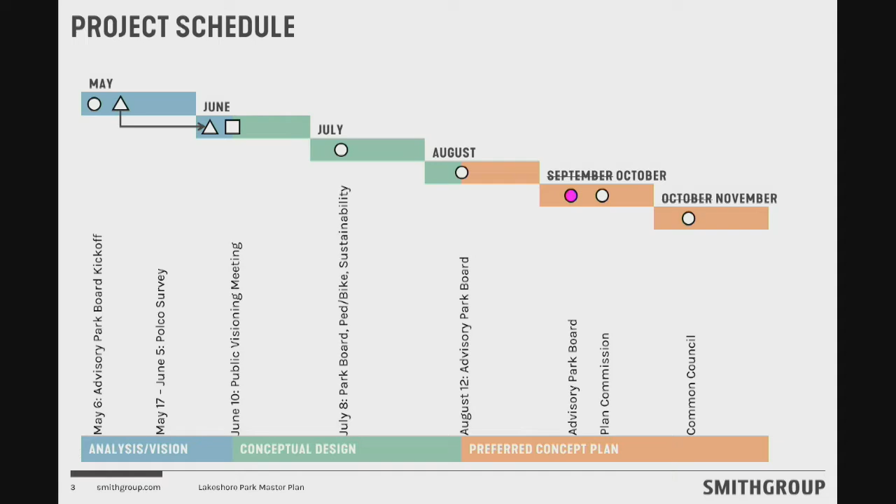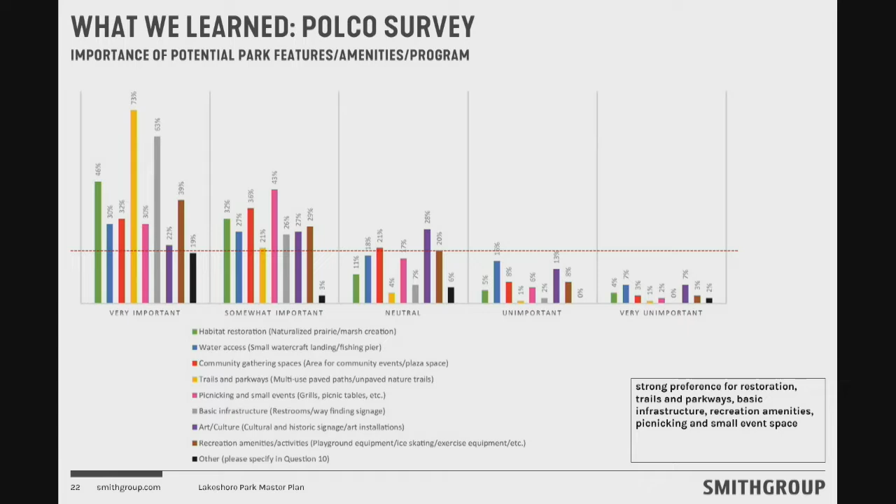In the bottom right, that's our coarse-grained summary of the takeaways: there's a strong preference for restoration, trails and parkways, basic infrastructure, recreation amenities, picnicking, and small event space. So really, a nature park with space for people is one way to describe it. Depending on what we were looking at, preferred activities, time of year, etc., the results kept returning that same basic message. Even the comment cards where people weren't answering our specific questions, we were still hearing the same thing - public art, trails, and nature ranked highest.

Last time we also talked about the big drivers in terms of how we're understanding the site and what we're trying to do with the design. The 3 options we talked about last time in August really focused a lot on water and leveraged water as an organizing backbone for the site, if you will.

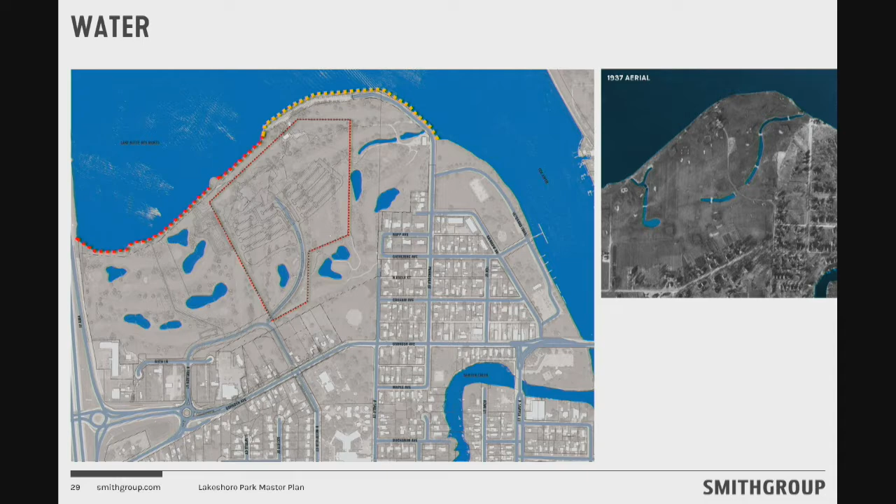The existing ponds are in that diagram on the left, and then the aerial here is the 1937 aerial. You can see those ponds were really more of a little broken stream - this was the remnants of when the river meandered and moved around more than it does today. We were interested in figuring out how we could work with that history.

We talked a lot about edges. I think we have over 4,000 lineal feet of shoreline. Importantly, we also have these two connections to Rainbow Memorial and Mary Jewell Parks. So really what we do at Lakeshore, along this east edge, can work to connect the parks together. With Rainbow in particular, that's all about waterfront connectivity, a big important move at a city scale.

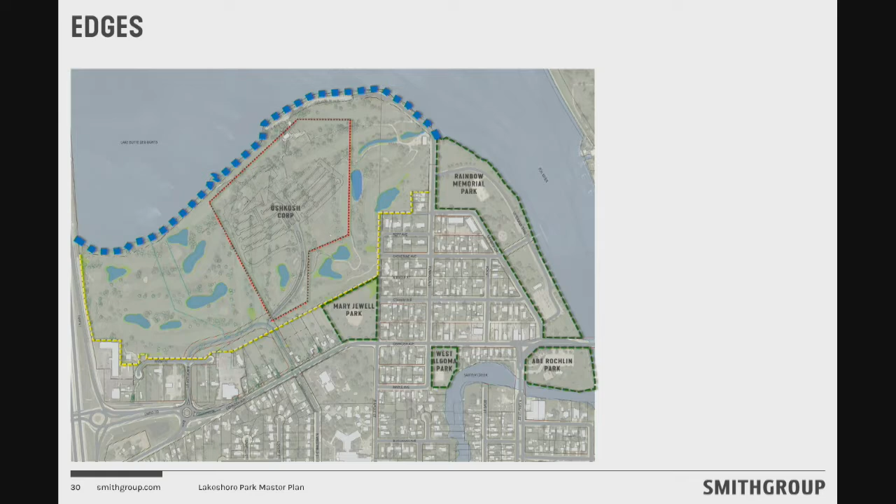The yellow dash line is where the park backs up to mixed use development and existing residential neighborhoods. One of the big takeaways was that the west half of the park has edges that are a bit of a back door - there's the hotel, the freeway, and the businesses at the west end of Oshkosh. So that west end started to have this introverted character, kind of an island park.

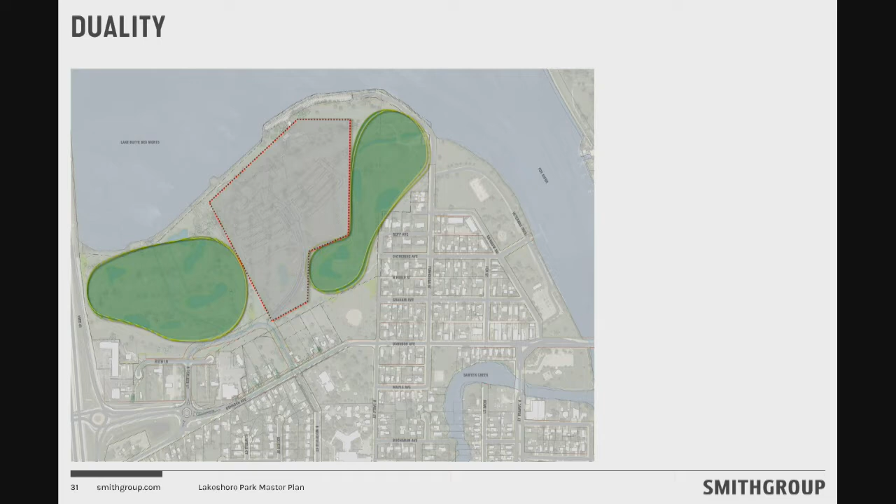The east end is the point where you go out to the end of Punhoqua, you kind of immediately engage the lake, and there's the connection to Rainbow Memorial. So two very different halves grew out of this way of looking at the park.

And then this is where I just wanted to run through really quickly those precedents that we looked at last time. We had this idea of the threads, places, and moments - just our way of organizing our language.

So we've been looking at water and restored habitats, and I think the big takeaway is, even if the pond network sort of remains in situ, we're still looking at restoring the margins of all these water bodies as part of this phased implementation process. Right now the ponds are bodies of water with cattails at the margins that quickly transition to lawn, because it's a golf course, or it was a golf course. I want everybody to keep images like this in mind when they think about the future condition of the pond, because the idea is to aspire to that nature park.

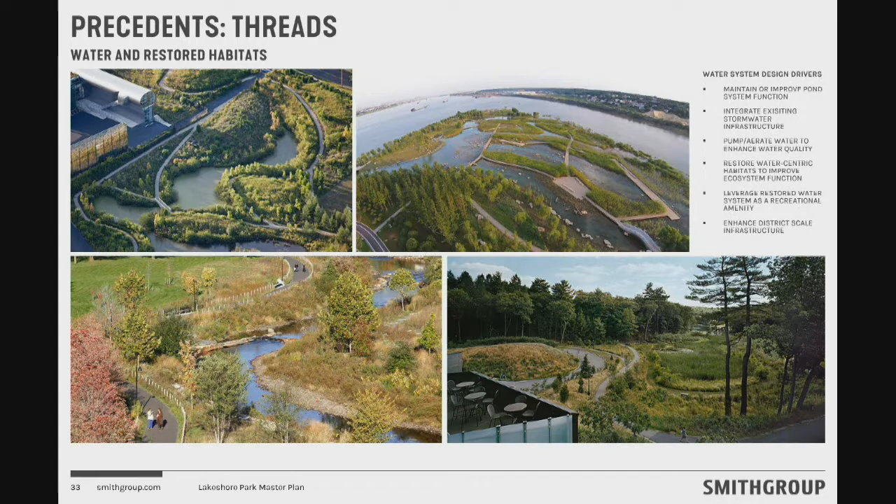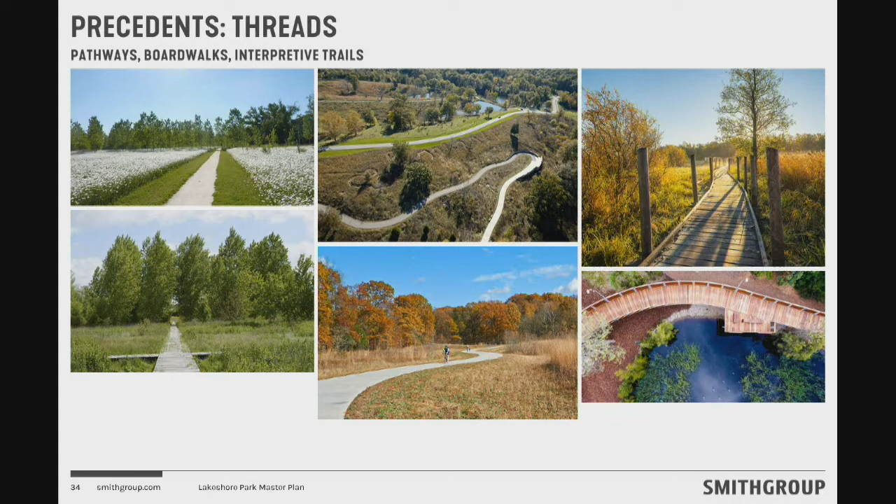Of course, a park of this scale needs trails, pathways, and boardwalks critical in terms of connection, which is one of the basic program elements of the park. Open buildings too, everything from naturally ventilated restrooms to open air picnic structures, are things we've been looking at locating throughout the park.

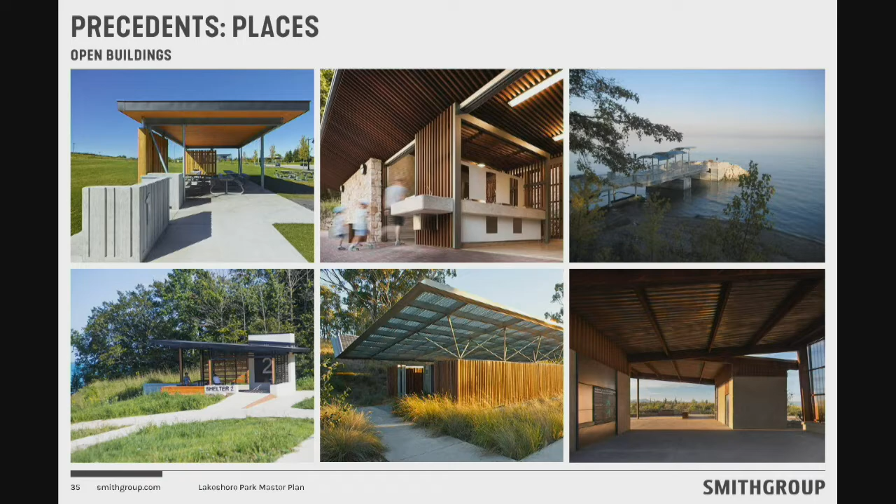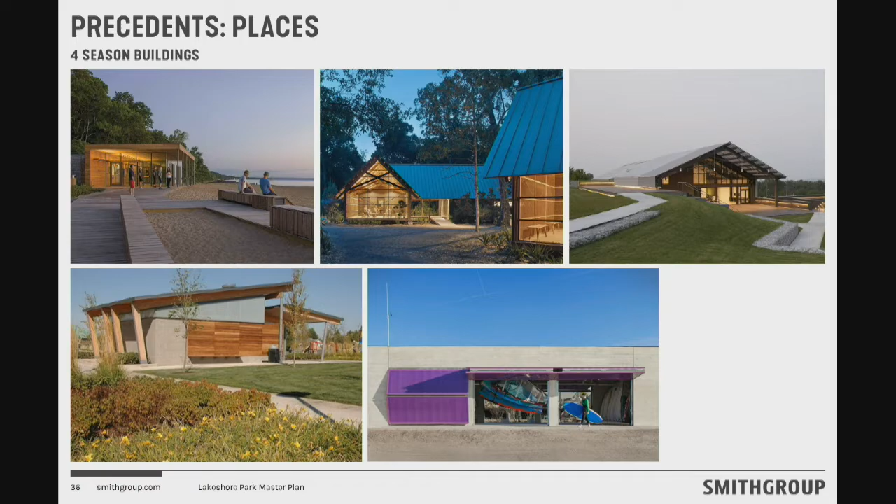We've also been talking a lot about a four-season building, and last time, all three of the options we showed you put that building at the end of Punhoqua. There's infrastructure there, there's a street there, there's a lot of good rationale behind why it found its home there. We'll have a little more info for you on that.

And then this idea of earthworks, in particular at the west half of the site. The freeway noise is pretty dominant unless you get down to a low spot or you're protected by topography, so the idea is building up the earth around that core area to make that an inviting space.

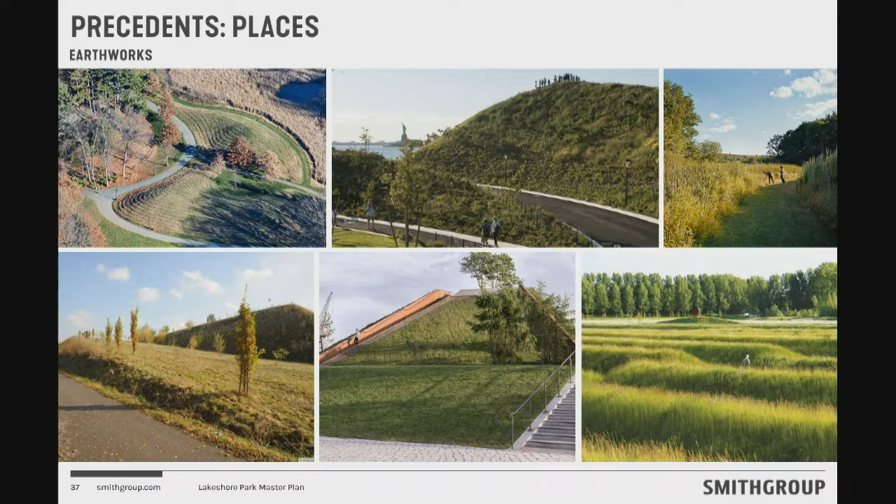And then just smaller places throughout, places to launch a boat, park your bike, places with signage, overlooks, that sort of thing. These are the smaller things that at the grain of a master plan on a park this size, you almost can't even locate in a plan, they just sort of disappear. But these are things we always have in mind as we're thinking about trail networks and designing space.

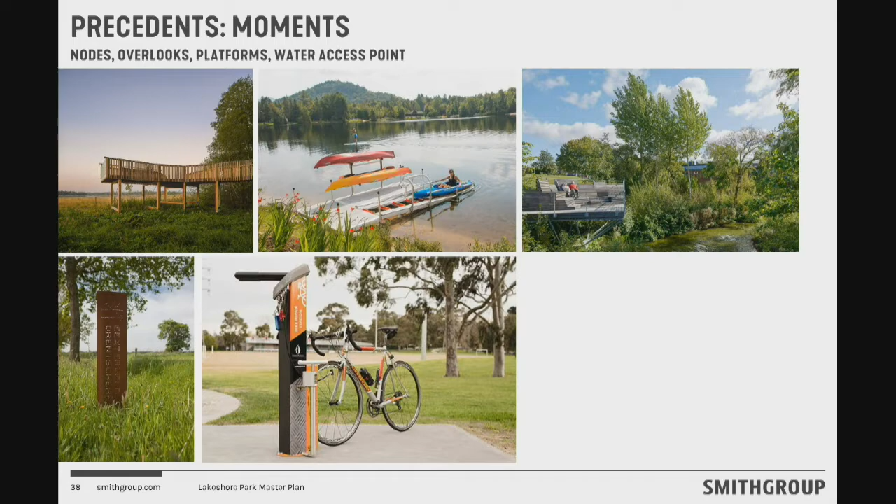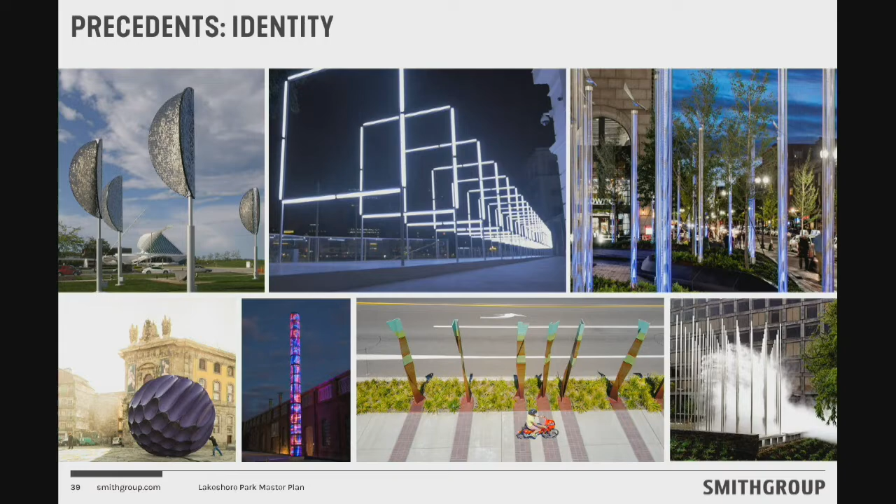And then this idea of art. Last time we talked about this as a way to put an exclamation point on top of one of those earthworks at the West Park to create a sense of identity. It could be everything from literally a sign that says Oshkosh to something more abstract. We also talked about something akin to a light installation that would work well at night, giving people a reason to hike around the park in winter.

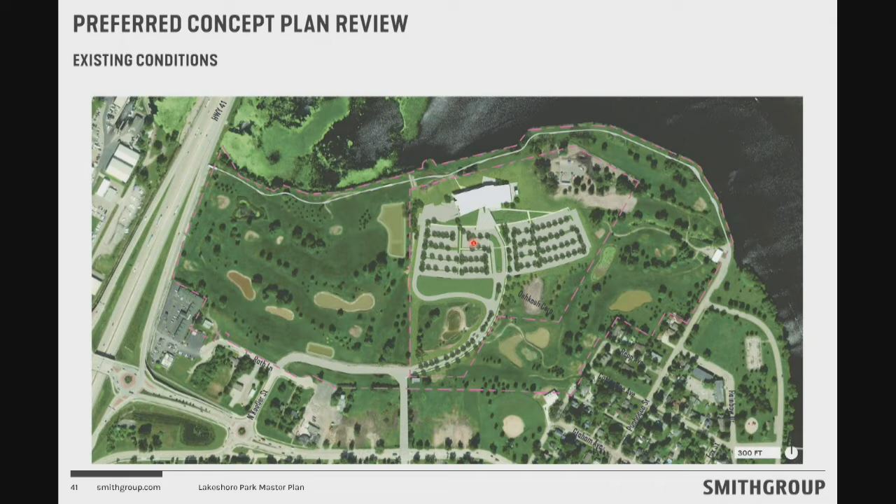So this is the existing site with the Oshkosh Corp site rendered in, and also you'll note the trail rendered along the waterfront. So that's that white band that snakes through.

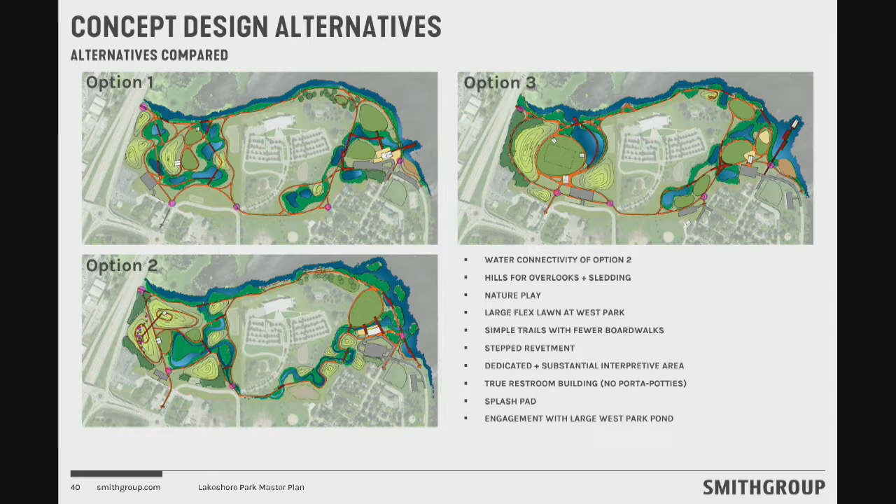This is where we're at with the preferred concept plan. It's pretty similar, if I can jump back really quickly. It has a lot in common with both option 3 and option 1. We kind of went back and forth about the best way to approach the water system, and that really became a big driver for where things landed on the site.

Where we're at right now with the water system is that we're maintaining the ponds more or less in place and maintaining their function. So think about it in terms of the pipes that engineering just put in last year are still in the ground, connecting the ponds in the same way. The elevation and the bounce on the ponds is the same as it is today in terms of how they work to manage stormwater and move it through the site, which happens in a counterclockwise fashion, right?

More or less. What we're proposing is that these things kind of work the same way, but we come in and regrade the margins of all these ponds, and in some places we add small extensions. That's why you see some of these shapes in the preferred concept not being a one-to-one with what's out there today. But we were working with the assumption, from a costing exercise standpoint, that we would basically touch 50% of the edges of these ponds to rework them and make them feel more connected.

And then the dark green that you see weaving between them is that idea we talked about last time, which is the wetland habitat vegetation type that we would use to link them together visually, even though we're not necessarily going to have an overland flow connection from one pond to the other. So they become part of one network, but we took an approach from an investment standpoint, a maintenance standpoint, etc., to work a little more closely with the footprint of what was out there.

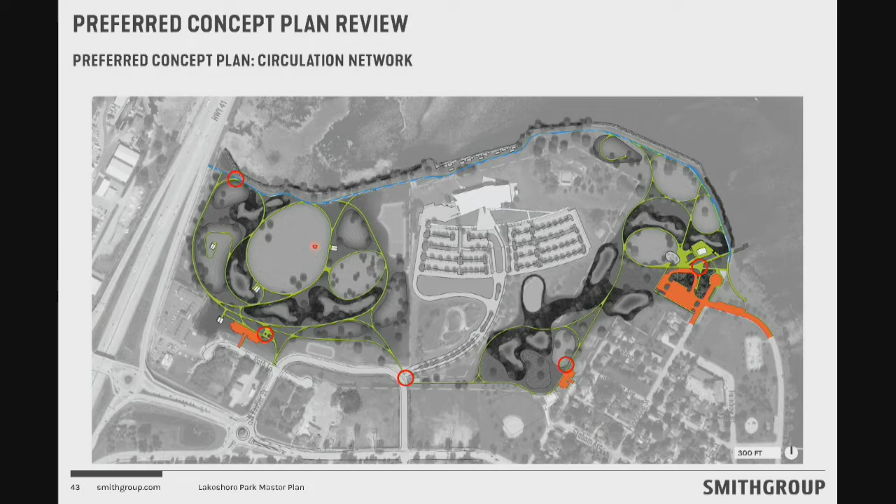I mentioned earlier that we've been thinking about this West Park as being a little bit more introverted, just given its context. So between this ring of water and the ring of earthworks, you get a feel for how well defined that great lawn in the middle of the West Park becomes. But still trying to maintain some long sight lines to the water from that lawn.

And thinking about views from these small buildings - these are the open air picnic shelters - one kind of across to the hilltop with the overlook and the artwork, one kind of the long view through the lawn looking towards the water.

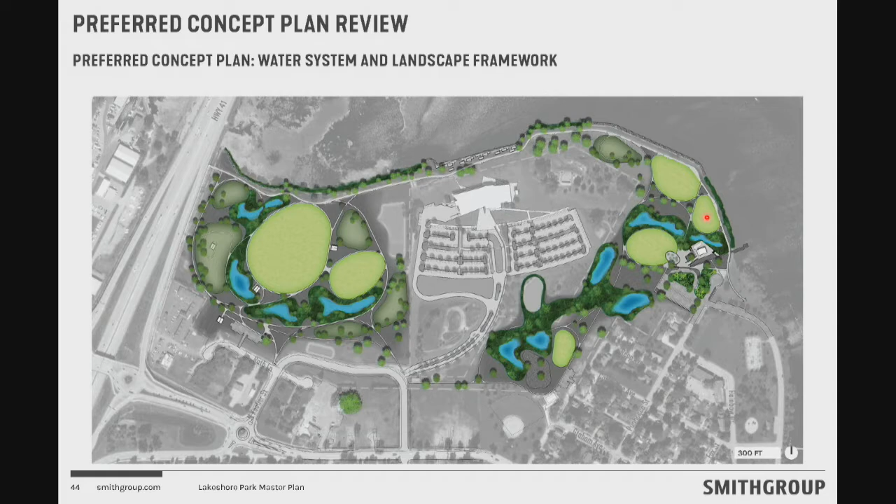And then at the east half of the park, you get that same sort of definition with water surrounding this phase 1 knuckle and a couple big open lawns that front the water's edge.

And we can go through this in a little more detail too. So this was in your packet - this is the kind of 3-zone breakdown. We'll look at the West Park first.

So again, the idea of these earthworks that help to contain the site, block some of the noise from the freeway, block some of the less desirable views, like the Oshkosh Corp parking lot. You'll still see the building peeking through in the background, but to kind of give you some foreground other than that slope up to the parking.

Two big lawns - one a little bit more densely planted with trees. The thinking here is this one starts to dissolve into this forested edge. The water system, and then down here we've located the restroom building. It's kind of towards the periphery of the site, but the reality is that this is the point where we have infrastructure and can gravity drain a restroom.

So if we were looking to put this somewhere else, we'd have to get a little bit creative in terms of something in between a porta potty and a restroom.

So about how far is that restroom and the parking lot from the actual open-air picnic, from the lawn? Like, you'd carry all your stuff to that? Good question. So the parking lot is 60 feet wide, so I'd put it at 200 feet to this park shelter. But that's a very good question in terms of wheeling stuff in.

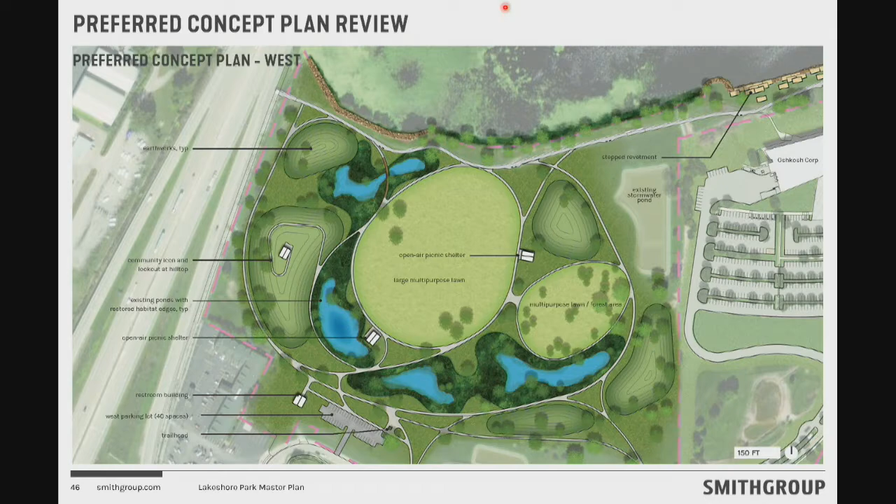Ray, do we have the staff to maintain this once we blow the 2 million?

We really don't have the staff to maintain what we currently have, Bill, and you'll see that in our budget request that's coming to the council next week. We're in the same boat as anybody right now, struggling to find staff, keep staff. That's why we're proposing our budget to increase our staffing potentially if available, and I think we're going to have to — we're falling behind on just routine maintenance in our other parks, so continually adding this and Riverwalk and other things to us is becoming a burden.

So once we are fully developed here, it's going to take some maintenance. We're going to have restrooms to clean, and all the other things that come along with added amenities and features. So we don't have the staff today to do what we're looking at. Completely developed, I would say no. Okay, all right.

So, the big overview for the east half of the park — we'll look a little bit more closely at phasing, but there's the four-season building with associated terraces, a public plaza with a splash play feature, a large flexible lawn, and a couple more big lawns closer to the water. These are pretty substantial size-wise.

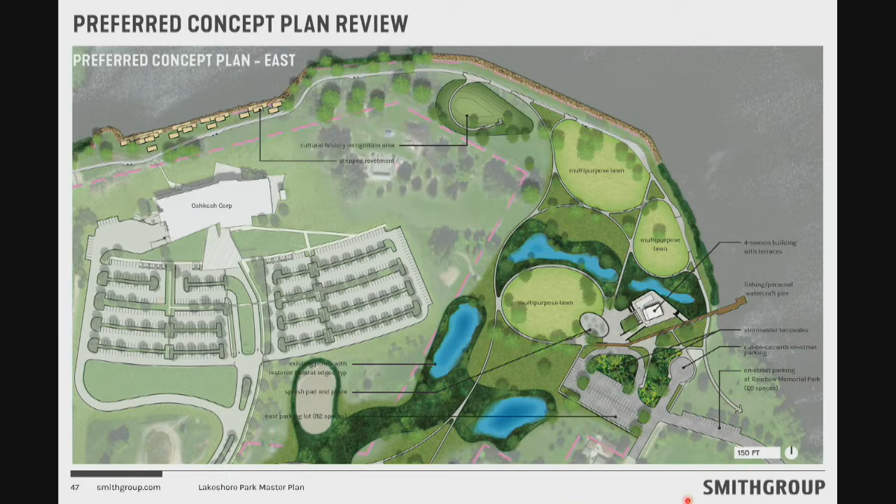And then, wanted to zoom in on this a little bit so you get a slightly better feel. The idea here is in terms of arrival: if you're coming in by car, you'll be coming through a drop-off loop or coming right into the parking lot.

What we propose to do is pull that building and its terraces up a few feet so that it has good views over the ponds, over the park, to the water. It also gives it a bit of significance relative to the rest of the park. And the other thing that does is this building is about 2,500 square feet.

That is a pretty good size for accommodating somewhere between 120 to 175 people in kind of a flexible venue space, with associated restrooms and things like that. So the thinking would be that this building has dedicated restrooms for the interior space and would also have exterior entrances for restrooms that would serve the park.

So by putting this up on the terrace, not only do you gain some views to the surroundings and make the building very visible, but you also allow the splash pad and the plaza to keep working even if there's an event here, because it's easy to rope off those two zones and have them doing different things at the same time.

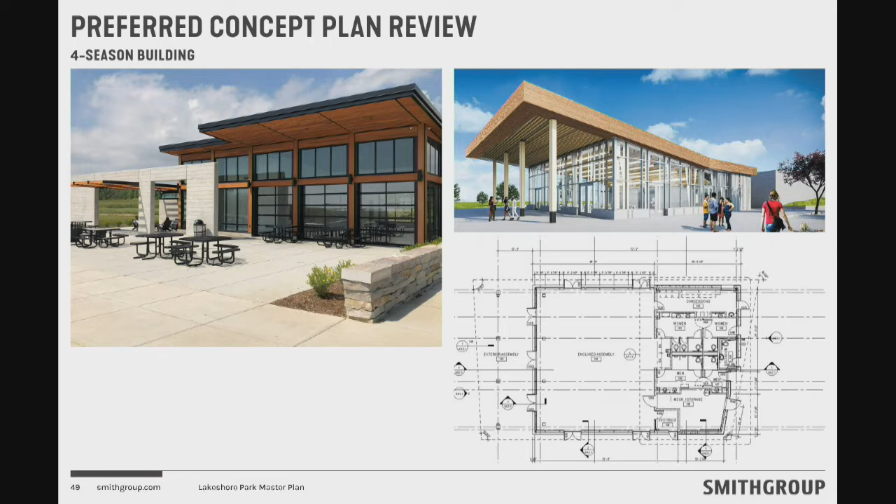You want to get married? No. I meant to me. Oh, no.

Can you go back, Nathan? We've had some discussion about bioswales versus adding more ponds, so if you want to talk a little bit about that—on this drawing? Yes. So the thinking is that we're introducing quite a bit of new impervious area at this end of the site between the plazas, the terrace, the building, the parking, etc. So these two big zones of textured green between the cul-de-sac and the drop-off, and within the drop-off itself, we're imagining those would be stormwater GI—basically bioswales, detention areas—to treat that stormwater before it gets passed down to the pond network.

So I guess in my mind, what we were envisioning is kind of what's by the convention center, Riverside Park type bioswales, and as Nathan said, that really helps with the quality of the water. Yeah, and we also have a lot of green space knit throughout. So if we were in a more detailed design phase of this project and engineering it, we'd be sheet draining this to landscape areas and collecting it there, not putting it straight in a pipe. There are other things we do as standard practice to mitigate some of that runoff impact, but we are acknowledging two pretty substantial areas to help handle that.

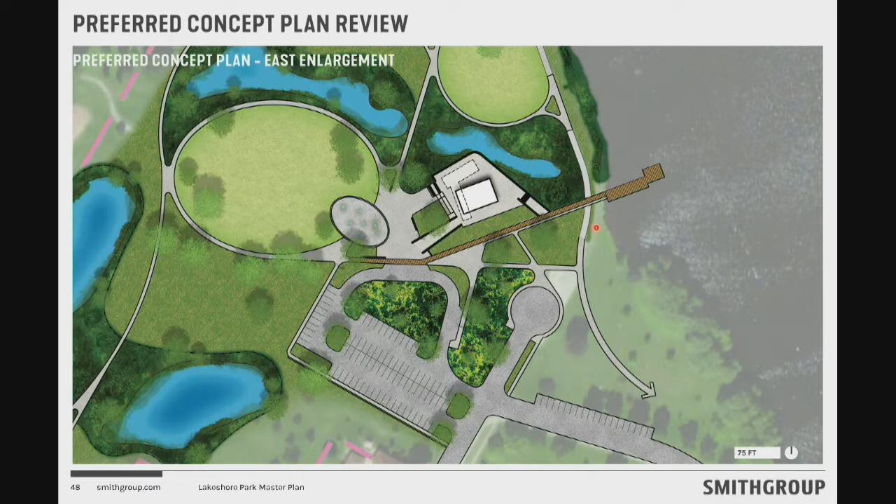So this is really that water access, and people will use it in different ways. Somebody might come up doing the water trail kind of idea, paddle up from downtown or campus, dock their boat and just use the pier to get to the park. Some people might come to the cul-de-sac, unload their kayak, and take it down the beach to the water. So I think there's different ways we can approach that.

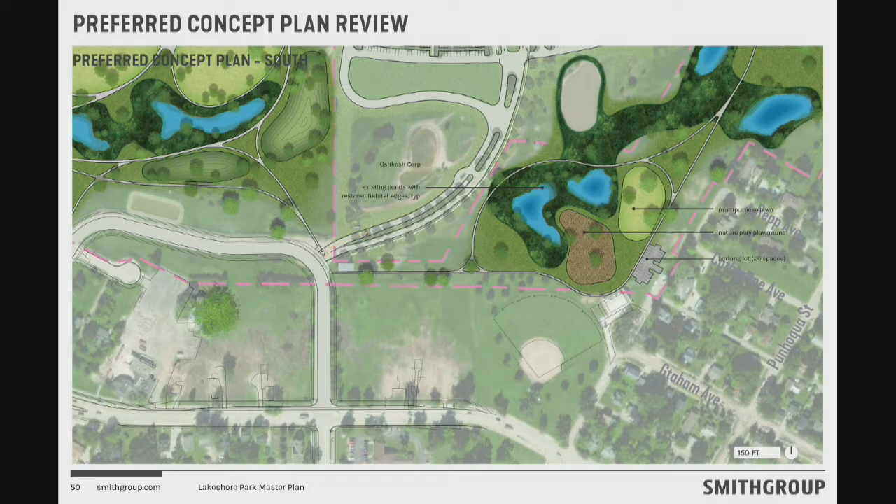So we're calling these budget targets, because you can't really do a cost estimate on a master plan unless you want to build in a 100% contingency. There's just too many things that are not figured out in the level of detail needed to inform a unit cost takeoff.

One of those things being what I mentioned earlier in terms of grading associated with tee boxes and greens and things like that. But what we did do is think about this in terms of phased improvements, and where we knew there was the potential for a lot of cost relative to the total project cost, we tried to get into more detail in terms of a coarse grain cut-fill analysis, looking at how much it costs per cubic yard to dredge versus excavate onshore, that sort of thing.

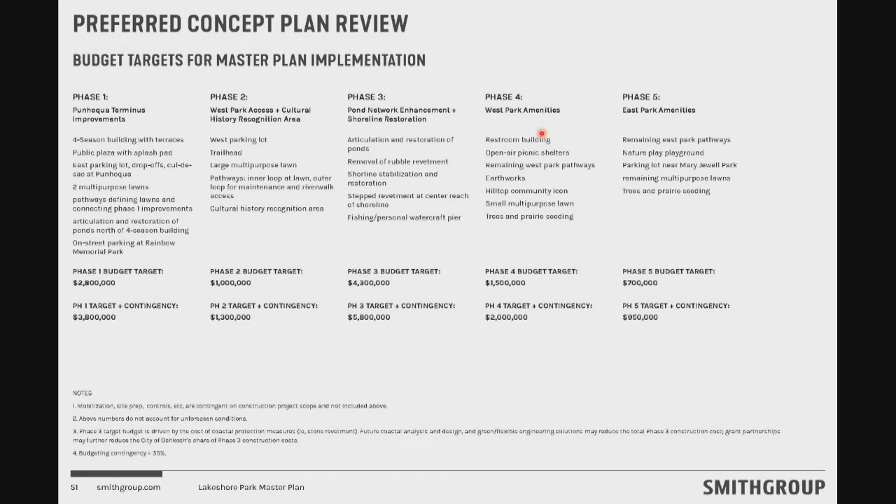So that is built into the numbers, and I'm sorry we can't read this—I can try and zoom in on it—but this is basically breaking down those items that were in this spreadsheet, with a unit cost for each item.

So phase one is basically the building, the parking, the lawns, revamping the two ponds adjacent to the building and lawns, again because the building terrace is going to engage those—that's really part of how this building fits into the site. So prioritizing those. And what you see here, that kind of thread that weaves through, that's the existing trail—that's what we're stitching into.

The big costs here in phase one are really the building. We don't have a building designed, but a good budgeting number for this type of building is about $500 a square foot. So we assumed a 2,500 square foot building that gets us to about $1.25 million.

And then the remainder of the big costs, between the terraces and things like walls and stairs to get you up to the building, the public plaza, and the splash play—I think in total that probably adds about $1 million more.

Does that help? Okay.

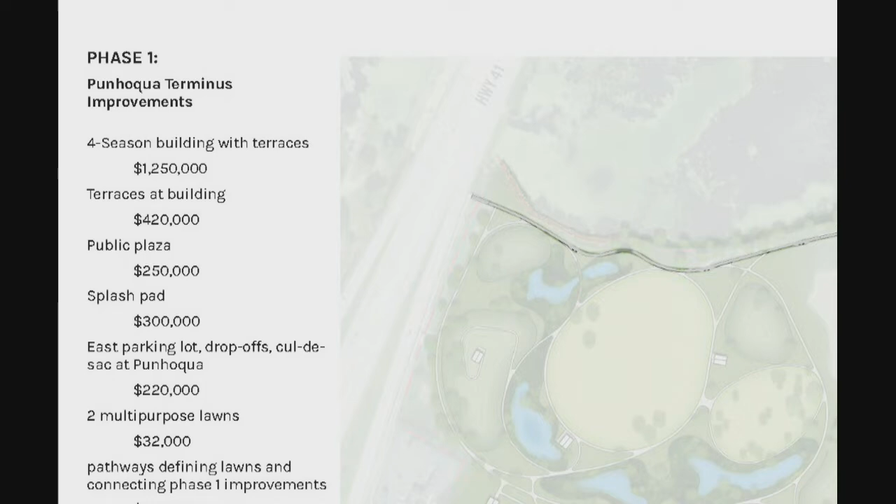So it gives you a feel for the breakdown of this phase one piece. Again, scraping and seeding the lawns is a pretty low ticket item. The bulk of the work is in things like terraces, and here in phase one, this terrace is engaging the pond—this idea of holding that thing up behind a retaining wall.

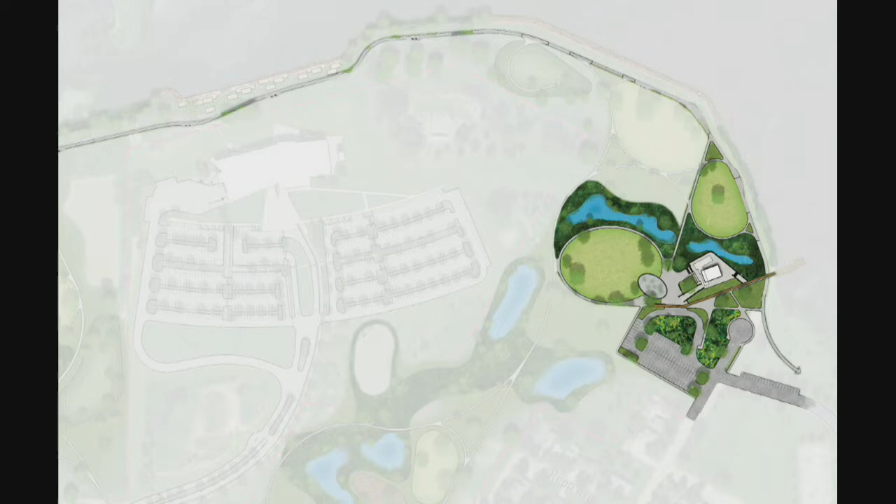So we're trying to be conservative with what we're presenting to you in terms of numbers, knowing that at a master plan level there's still a lot to figure out. But that puts us pretty close to our phase one target, just with hard costs.

We put a really big contingency on this because we want to be conservative. The reality is, when the city comes to budget this, they will set a budget based on anticipated costs and what the city can do as they phase this in. So this is meant to be kind of a target, and then it gets dialed in as we go.

The other thing I wanted to mention about the phasing is that Ray and I have been talking about phasing as brackets on improvements. We don't necessarily think you'd build all of phase 3 or all of phase 4 at once, but it's a way of prioritizing this without getting too into the weeds in terms of 15 phases of work, right?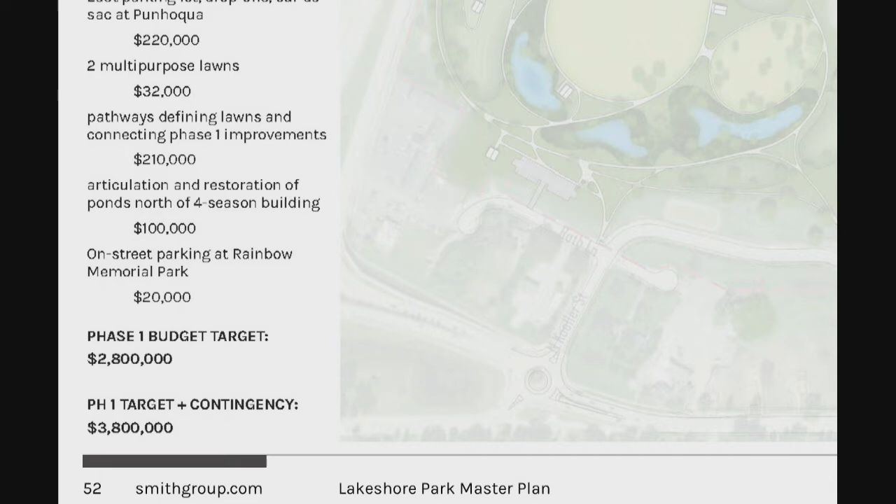I just need the people at home to hear you too, Nathan. They're all having sticker shock, just like we are, Ray.

So phase 2 is basically lawn and pathways, parking, and the trailhead at the West Park. Hard costs are budgeted at $1 million for that.

Phase 3 is revamping, cleaning up, and restoring the edges of the pond system, except for the two ponds included in the phase 1 costs, and then restoring the shoreline. This is a pretty big number—I think it's 4.8—but the bulk of that, frankly, is in excavation of the shoreline and re-revetting and protecting that shoreline.

Right now, some costs we're seeing on projects around the state for a revetted shoreline are on the order of $1,500 to $2,000 a lineal foot. You have 4,500 lineal feet of shoreline. We assumed for this pricing exercise that, given this is a very shallow lake, you have some wake issues through this zone as boats exit the river, and some important infrastructure at the west end of the park, so we made the assumption that we're re-revetting about 25% of the shoreline.

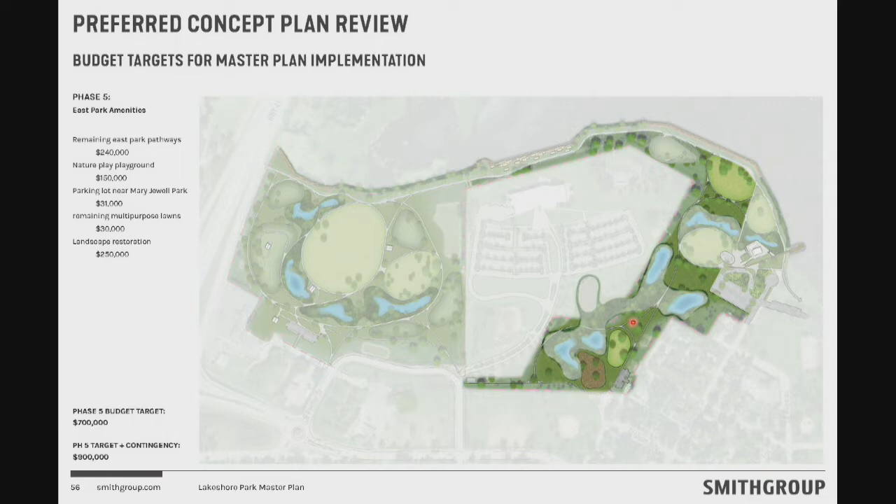And then phase 5 basically fills out the rest of the east half of the park—the lawns that weren't included in phase 1, the nature playground, and the restoration work. This is basically that regrading, reseeding that would effectively erase the golf course look and give you the nature park that people identified.

So that is where we are currently with the preferred concept plan and trying to get our hands around phased implementation of the plan. Ray, do you have anything else you want to throw in there before we open it up?

No, I think you covered a lot of things. I know there's a lot of uneasiness about the price tag, and I understand that, but as we've been saying all along, this is probably a 20-year plan. We're not going to bite this off in one or two chunks—it's going to be 10 or 15 chunks. So we need to understand that. We have a lot of plans out there for a lot of parks, so ask questions of Nathan while he's here. We could talk about the different options for phasing, but when we looked at it, we felt phase 1 had to have some kind of a splash effect for the community, so that's why we needed that year-round shelter.

Just putting in parking spaces and a couple trails I don't think would be best use of our phase 1. So that's kind of what we were suggesting, the splash pad, some of those other things.

Initially, we didn't have those in phase one, but as we talked about it and thinking about some potential partners and funding options of others that might want to get involved, I think a splash pad on the west side of the city more. We've had some discussions about a splash pad in different areas with different groups. So something like that I think might be a possible fundraiser or a partnership with somebody, so it may not all be city cost, as Nathan said.

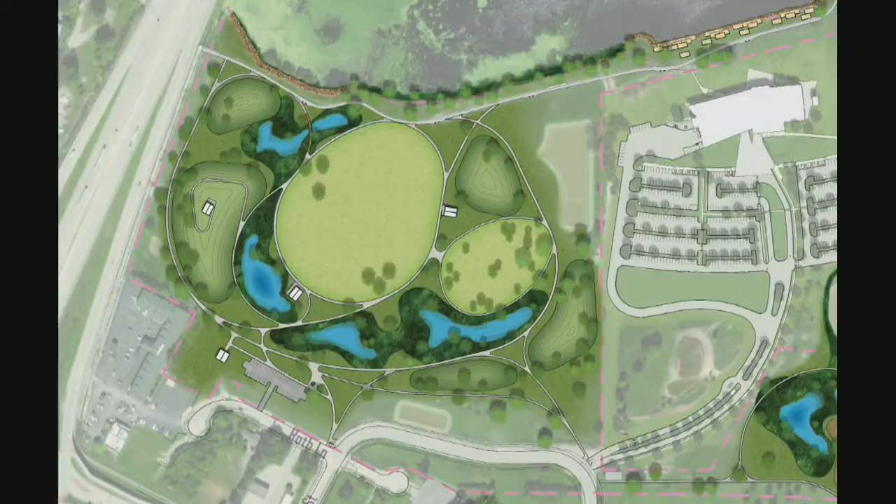But your point is well made. I know there was one question too that came up. Becky, you had the question, what was your other question?

Public art. I think we had up on the icon hill, didn't we have public art? We may want to at least add that visually, and not only visually, but add the verbiage, because I think that was missed by us somewhere up on that iconic hill as well.

I'm not suggesting that we put art in every spot that we can, but I think it'd be good to have a couple more isolated spots along the trails for public art. I'd like there to be more than a couple, more than 1 or 2 spots. And so, I picture this area coming off here where there's a triangle, having that be a spot for public art, because the triangle accentuates it. And then finding some other spots along that east side as well.

Not necessarily close to the cultural area, because that has its own definition, defined area, presence. But somewhere where there's, I think a lot of spots like trailheads and stuff like that are good spots for public art.

Maybe one way to put that within the context of the park would be to talk about those as true community art spaces, where local artists are making something, whereas the hilltop installation could be more about community identity, less an art destination, but more the icon that gets people up there, how it identifies us, hashtag Oshkosh, right? And I think in the final document that is completely put together, we'll reference that.

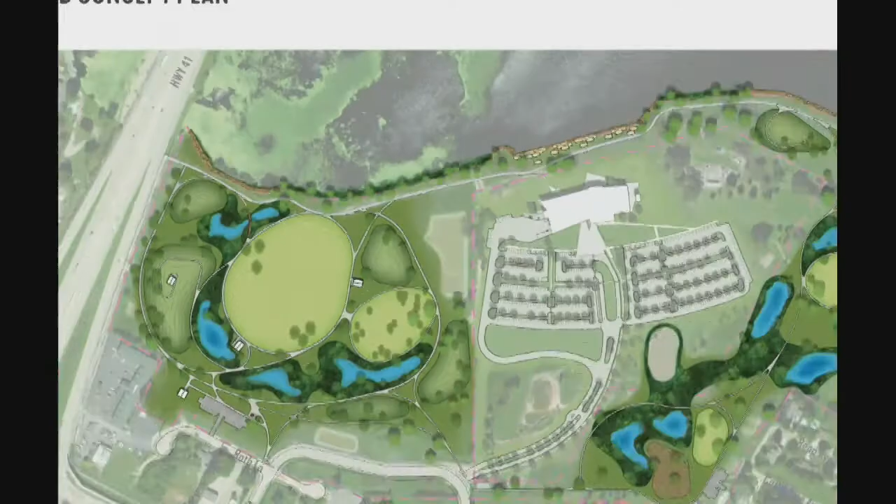Yeah, I guess I didn't see that as a bridge. Well, it's part of the new trail, correct? Okay, but it's a good acknowledgement. There are several nodes with seating on the trail that will remain. But I don't disagree with you, that was something I was thinking we need to take another look at as well.

Because previously we had looked at that little knuckle kind of at the west end of the stepped revetment, right, as a little sort of pull-off from the trail. And I think at this 10,000 foot level, that stuff gets lost, but I think what we need to do is be explicit about acknowledging that, at least in a diagram, so the intent is clear that it's not just all through-paths. There are moments throughout, and I think we need to address that.

So looking at the northwest corner, that could be, instead of a boardwalk, an extensive potential bridge there, correct? Well, so the bridge at the northwest pond, that was a boardwalk we were imagining, one of the few places where we kept that idea in. So maybe it's just a matter of a couple of knuckles on pathways engaging the water, and getting those few lookout points at the edge of the lake back in the plan.

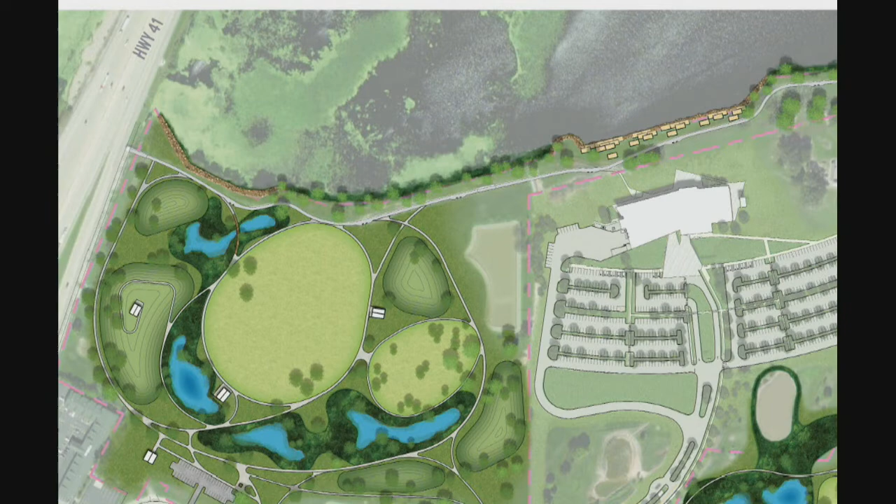And when you come up, please... Daunting, I know, representing everybody in town. Yep, all right, I'm turning in a couple copies.

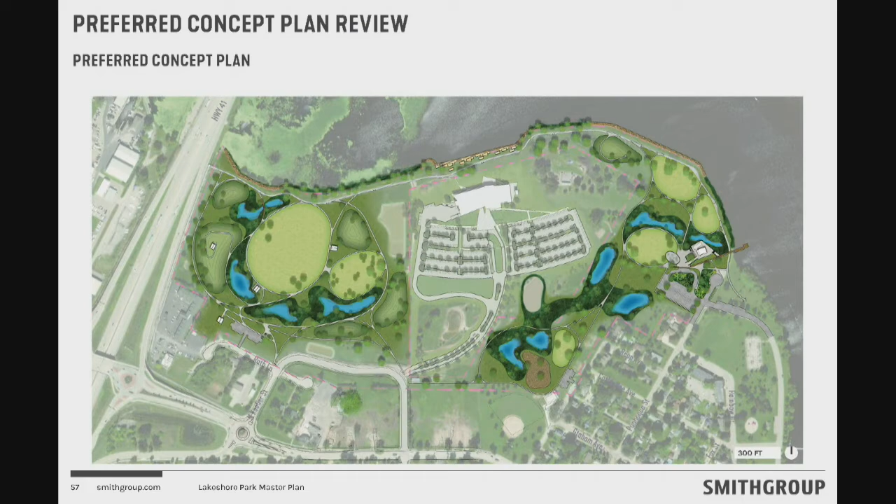And then cost. Obviously, the $10 million cost is huge. People will be choking on it. But this is our gorgeous park, this should be a real destination park, and it will be. Basically, if this concept plan can be more or less implemented, it'll be great.

But the public does need to have a preliminary financing plan before this concept plan is adopted, I think, or along with it. Questions that can't be answered tonight: what is the Oshkosh Corporation share? What significant Oshkosh Foundation fund campaign might be involved? What part might realistically be funded by grants? We heard some of that.

Then a more important question: what will the unfinished sections of the park look like until their turn comes? With a phased approach, how can we ensure that the plan for this significant Lakeshore Community Park will be completed?

I don't want to see part of it completed, the east half or something. Well, we haven't got enough money for the west half. No, that's just not a plan if we're going to do this.

And then I ask, should the top priority portions of plan in each section be constructed first? And I think I heard Ray say that the board might pick out top priority from here, here, and here, so that we've got something over on the west side, for example, instead of waiting.

I don't want to wait years and years and years, 100,000 here, 100,000 there, for this park. We just can't. So we have to figure out a community-wide way to address this. Big donors, like I say, Oshkosh Foundation, big fund campaign, something, so that we're not waiting maybe more than 3 years, maybe 4. That's my idea anyway.